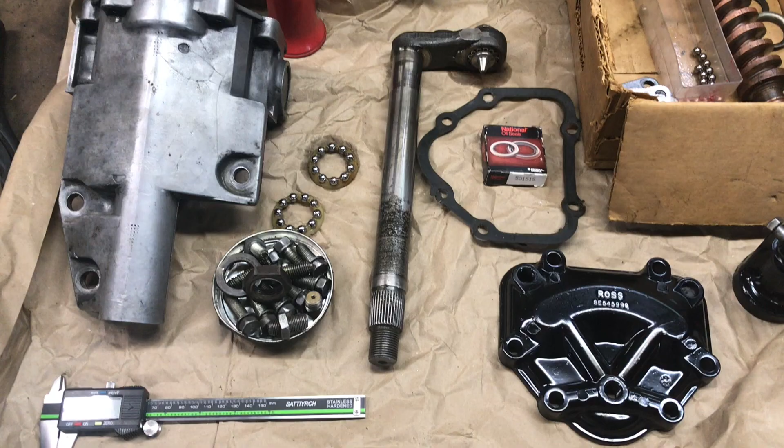Today I'm going to show you how to completely rebuild your steering box. This is the parts to my Ross steering box out of my 1965 Scout 800. I know Scout and International in general use different steering boxes, but Ross is the most common, and it's one of the more difficult ones to rebuild. So hence the rebuild video, and I'm going to show you how to do that in pretty good detail.

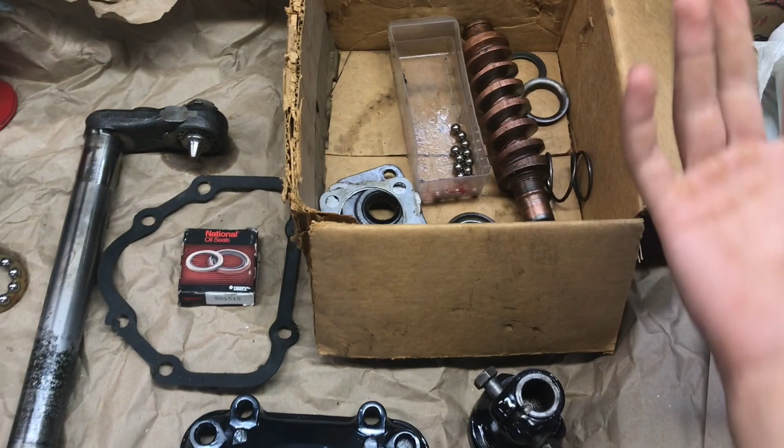I'm going to use the term rebuild pretty loosely here because some of these parts you can't get, like the sector shaft here, or the Pitman shaft and the sector shaft. You see mine is kind of worn there, and you can feel a little bit of pitting, because that's where the bushing rides, and this has a groove here and there occasionally, and a little bit of a chisel to it, but I was able to work that out, and I'll tell you how.

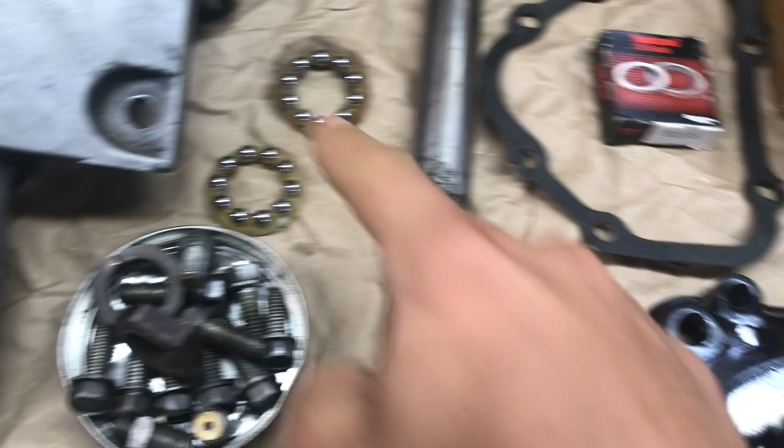And I don't have bearing races, I don't have new ones of these for the ends, but I do have a brand new seal for the bottom of this, and I have new ball bearings for that, and I have new bushings for the inside of the steering box for the Pitman shaft.

So I'm going to show you in detail what to buy and how to install the new pieces, because I had to get help with these bushings since you needed a press and everything, and I couldn't film it.

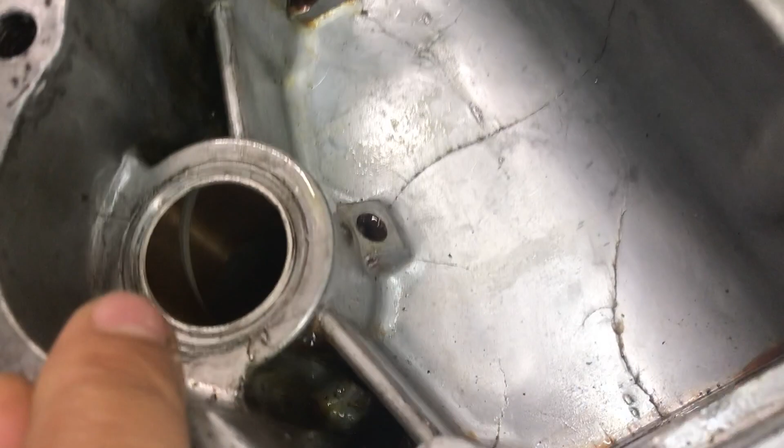Okay, so the first big thing is the bushings. These are brand new bushings, as you can see there. There's one at the top and one on the bottom. I was able to get these bushings from Straight Line Steering, a company out in California. I told them I have a Ross steering box, and I gave them that number.

So what you're looking for when you want to replace these is, there's all my old ones. Take it and measure it with the digital caliper, and the closest thing this matches up to, decimal wise, is 5/16 of an inch. So if you go to the hardware store, find yourself 20 or so 5/16 ball bearings and give it a measurement. Let's see if I can show you guys.

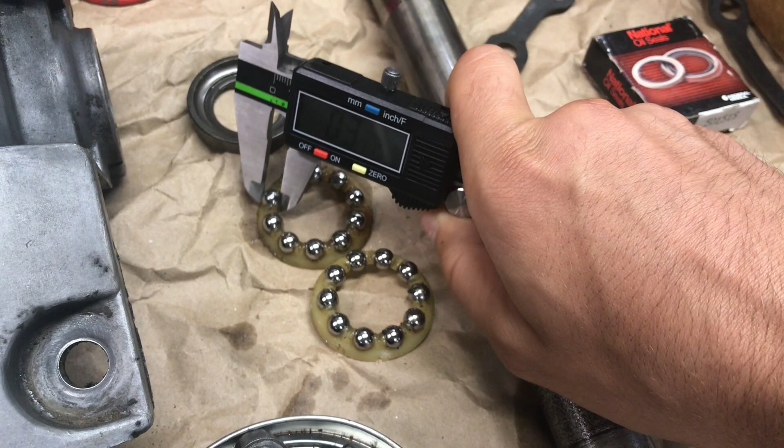Alright, so there's 0.3120. Those are the new ones.

And my old ones here. Stop rolling away.

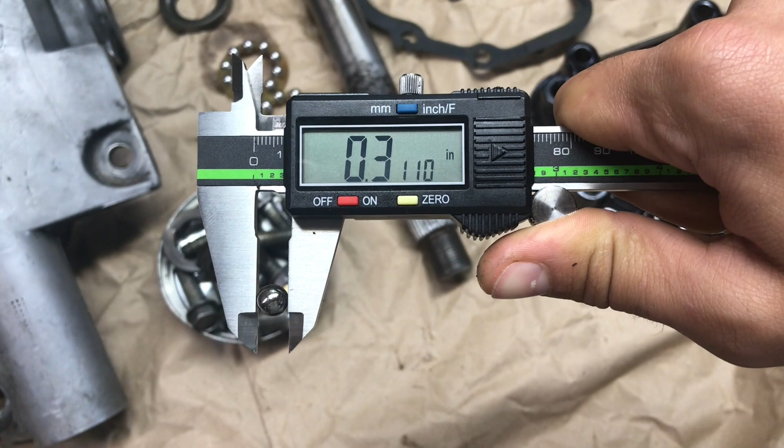0.3110. So these are a little bit smaller, and they're a bit worn out. Some of them have pitting, some of them have scoring. So it's best just to go spend like $5 to find some new ones.

And then you have this here - this is your Pitman shaft sort of thing that rides inside the groove here. This is what gets changed, spring loading wise, as far as how it sits inside here, and that messes with the mesh of the gears and how tight it is. It's just a little adjustment piece, and I'll show you how to adjust that once it's in the vehicle, and you can kind of feel around for it.

And so there's that, and then you have shims here. These shims are still good. I'll wipe them down a little bit, but otherwise they're fine. That's just to give the sector shaft a little bit of bushing so it could spin freely.

And then here's the end cap for the sector shaft, and it has this little seal in it. I don't have a new one of these - you can't get these anymore. I actually didn't ask Straight Line Steering, but they might have them, so there you go if you're looking for those. But mine is still pretty good, and it's still pretty pliable.

So I'll just pack it with grease and call it good. It's not like it goes under so much load - it just sits on this polished piece of brass. So how good does it have to be?

You tell me. Okay, so we talked about bushings, bearings, that seal. Now this seal - this is the one that kind of trips people up the most, and it's the one that always fails, because it's the most exposed to the elements, like when you're driving, heat and snow and whatnot. Depends how much you drive your Scout, but because mine was a plow vehicle, the bushings were worn slap out, and this seal was garbage.

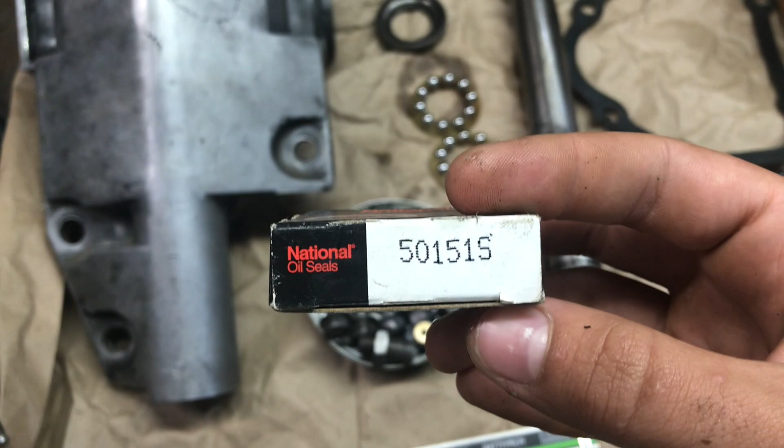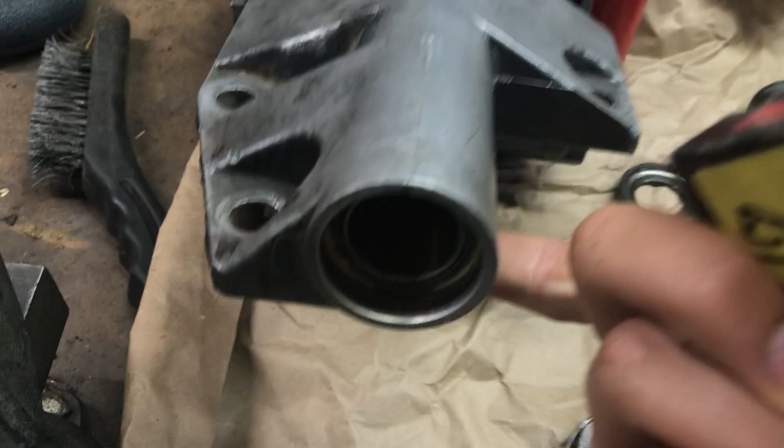So this is National Oil Seals Federal Mogul, part number 50151S. I got this from Advance Auto Parts. I think it was like $10, and it fits perfectly in the bottom here on that ledge there, and it will stop your steering box from leaking.

So if you just want to do this, it's easy enough - you could probably do it while it's in the vehicle. If you pop your cover off and pop your Pitman arm off, if you have the little puller for it - mine was really easy to pull off, but I didn't have the tool, so I took it to a buddy's shop and he did it for me.

But it's easy enough to kind of pull this out, so you get this out of the way, and then I think I pulled mine out with a screwdriver, and I'm just gonna install it with a socket with a little bit of blue Loctite. So nothing fancy to do that.

And then I was able to save my original gasket, but I'll put a little bit of RTV on there just to be safe, just kind of skin it, so it's got something to stick to in some areas.

But unfortunately, you can't get this and you can't get that, and I'm sure you could get this spring, but it's still pretty good. You could even stretch it out a little bit if you need to. And then you just have these shims that don't really wear out, so it's a pretty non-wear-outable, if that's a word, kind of unit.

So basically, mine is somewhat of an extreme case, but yours, if it was just used for normal driving throughout its life, isn't going to see this much wear, you know.

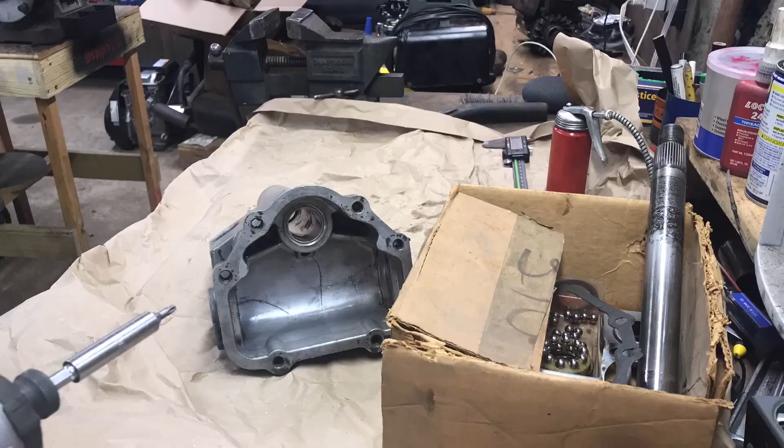Alright, so you saw me there put together and clean up the steering box a little bit. There's just a little bit of paint and grease and whatnot. So now I'm going to show you how to put your stuff back together as far as your sector shaft goes. The best thing to do before putting these parts back in is just wipe them down, nothing special.

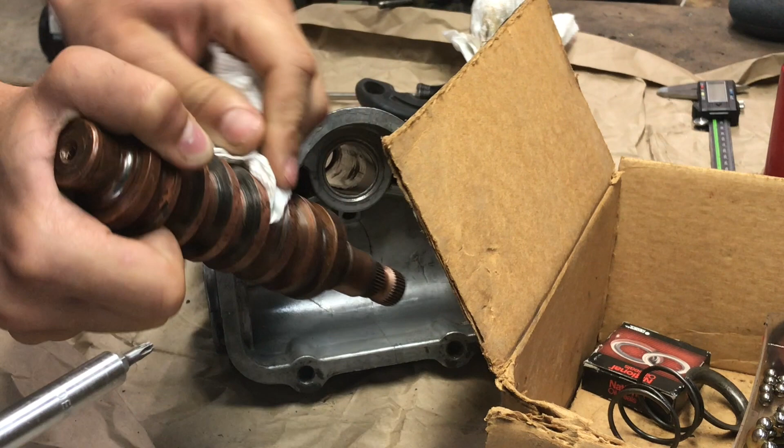Here you go, just like that, to pull any dirt out of it. Maybe from sitting, or maybe you just didn't clean it yet, but I've hosed this stuff down and brake cleaned many times, so it's as good as it's gonna get.

One thing to mention too, you want to make sure this surface is clean, because that's where your seal rides. You want to make sure this is clean too, because on your steering column, this little doohickey slides on the splines and engages with the rest of the steering box and turns this.

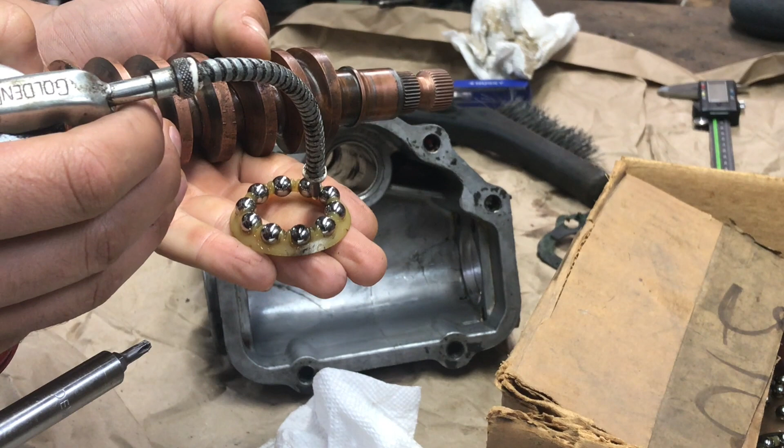So next thing you want to do is take your bearings here and give them a quick spray with some grease, because grease is a little thicker. You could also use assembly lube, but that's a little too thick in this case. So just kind of coat that around.

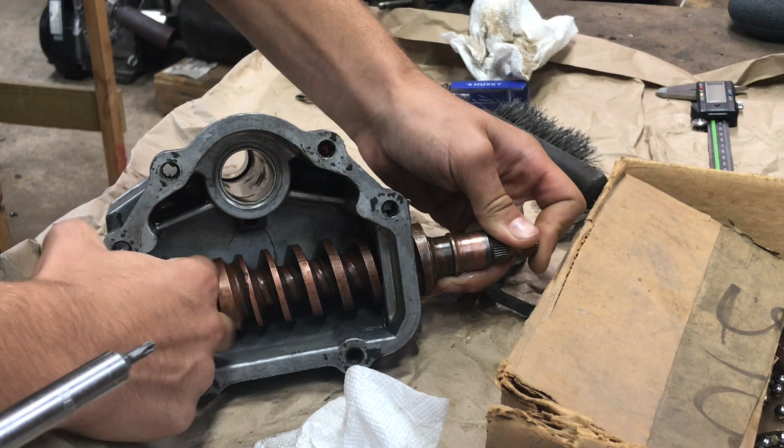And then on the inside here, we have our bearing race. So just gonna plop those in there, hold them in, and feed it through here. Just be careful not to nick the things too much on the edges, but it's aluminum, so you're not gonna hurt it too much. So that slips over that, and there you go, it's in there, right there, and then do the other one.

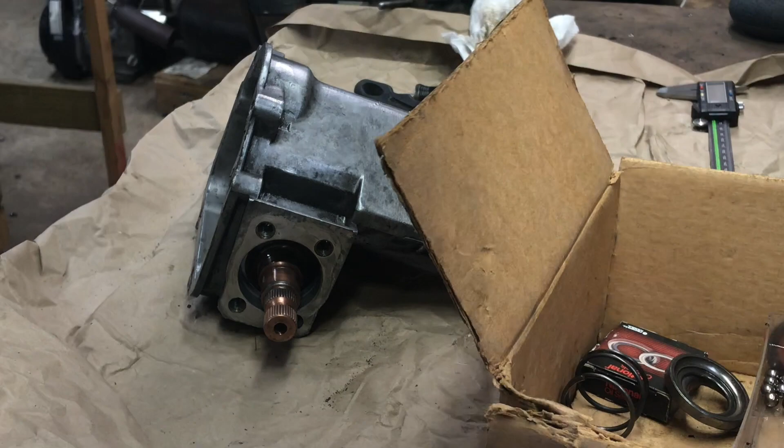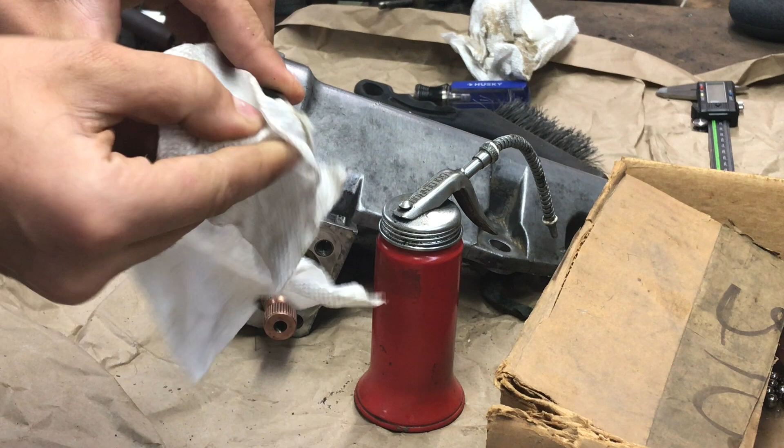So there's that. Just gonna wipe these down. Looking pretty good. So same thing as before, got our race here, put in our oil there, lift that back up there, and then clean your race. Just make sure there's no crap in where the bearings ride, because it'll just get ground right into those bearings, and you know, God knows.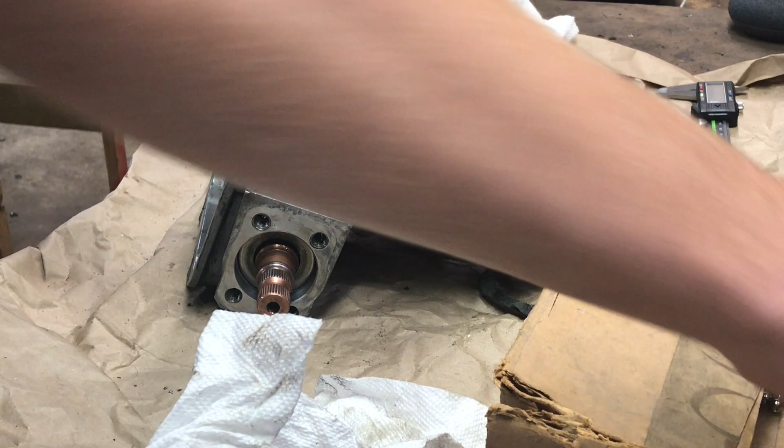So a little bit of oil on that too. And there you go, there's that. So then we have our cap here, which is all cleaned up already. And then that's got kind of an insert that sits inside of here.

And then we have our shims, which I think are a tad rusty, so I think I'm just gonna throw some WD-40 at them and wipe them down. Just a word of advice: here's the thin shim, and here's two thicker shims. You're gonna want to sandwich the thinner shim on the inside of the stack, just so the thinner shim gets compressed by all the other ones, versus making too much of a clearance or too little of a clearance when you torque down these bolts. So I'm gonna clean these up a little bit more, then I'll put them in.

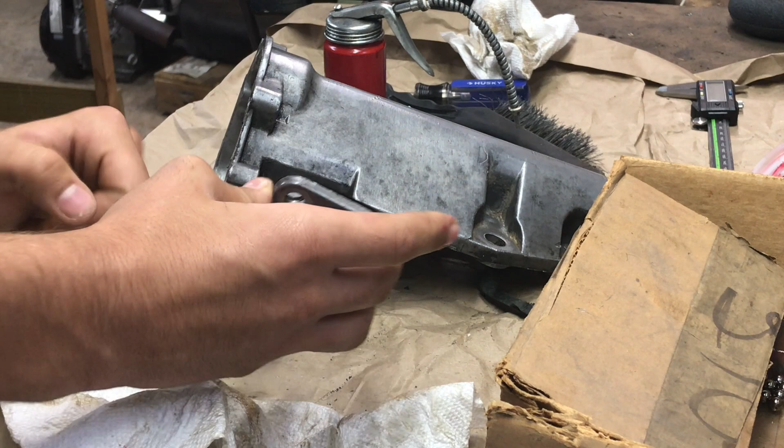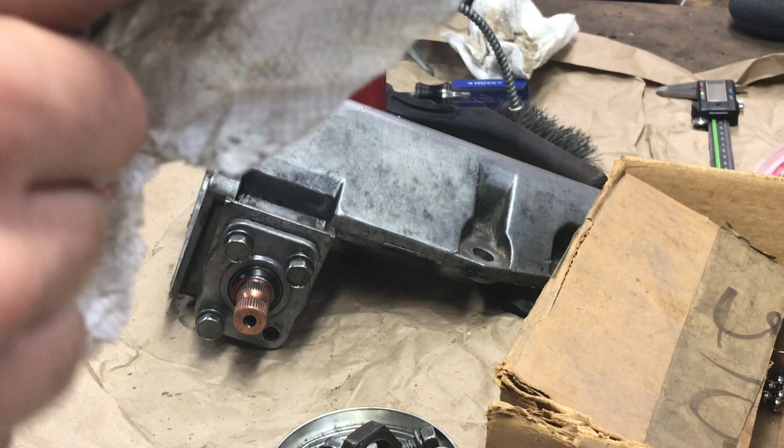Okay, so I went ahead and put my shims on after I got them cleaned up for the most part. And then I'm gonna take a little bit of grease here, not a whole lot, and just sort of fill it in and scrape it on the inside of the box here, or the seal, and that packs it in good. And then put that on, make sure my sealing surface here is clean, and just slide the whole thing on.

There we go, okay, now there's that, and then I have my hardware here, and it's these shorter bolts that just thread in right into the case. So throw those in.

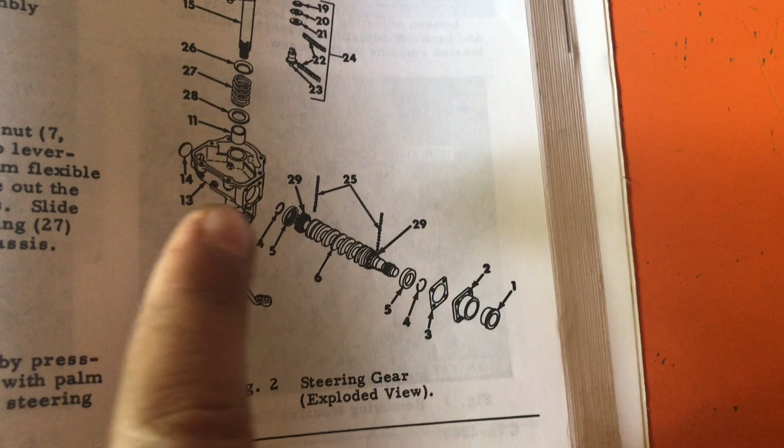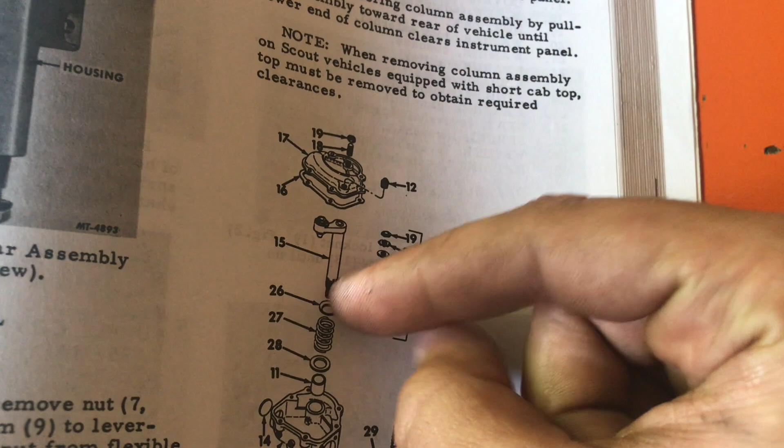And I did clean these up ahead of time. That was part of the lost footage there during - I don't know what happened, but whatever. So this one had a little bit of crap in the threads, but not gonna worry about it.

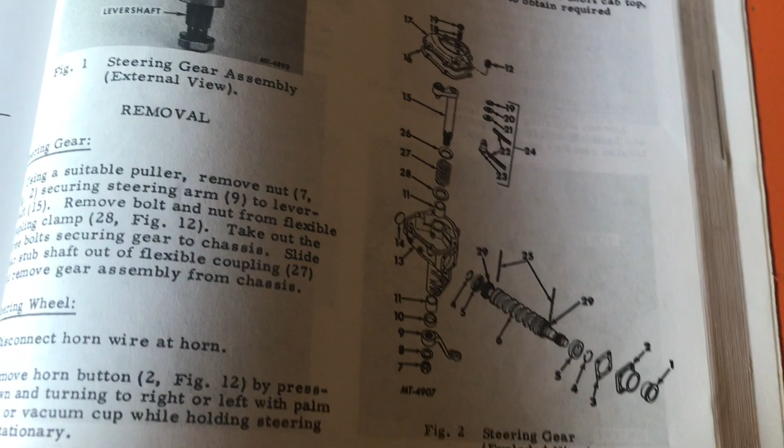Okay, so I'm gonna thread these in the rest of the way, and you're just gonna want to snug them down. Maybe use an impact to give them one or two sort of clicks. I don't know any torque values for these though. It's a bolt going into an aluminum case, so you can't over tighten it - you'll strip the threads right out of the box. So then what are you gonna do? Use your best judgment when it comes to that, and then I'll show you how to put in the Pitman Shaft.

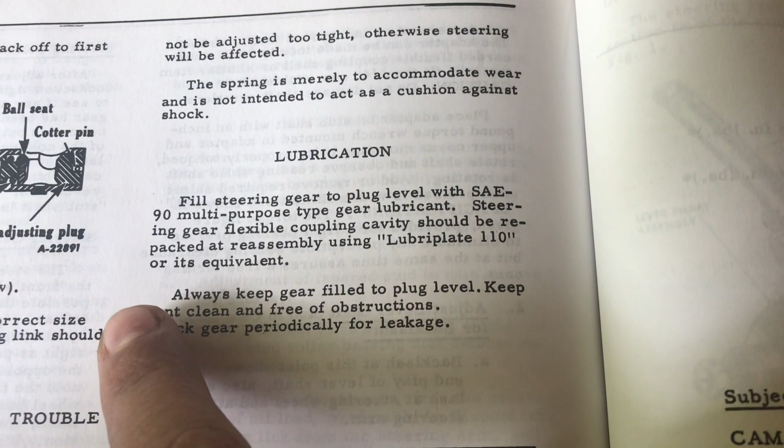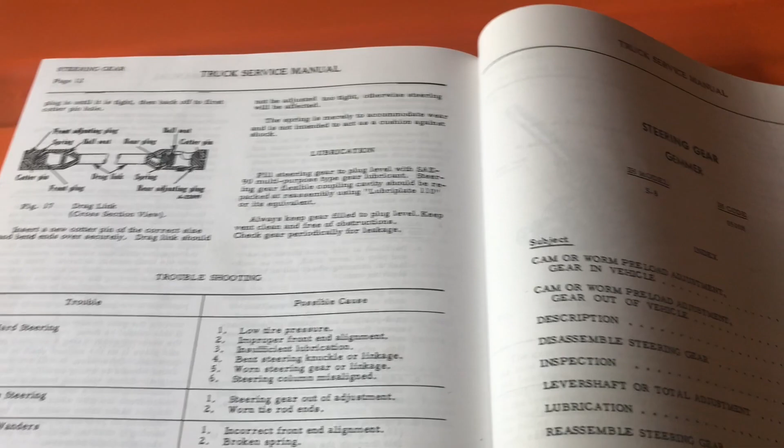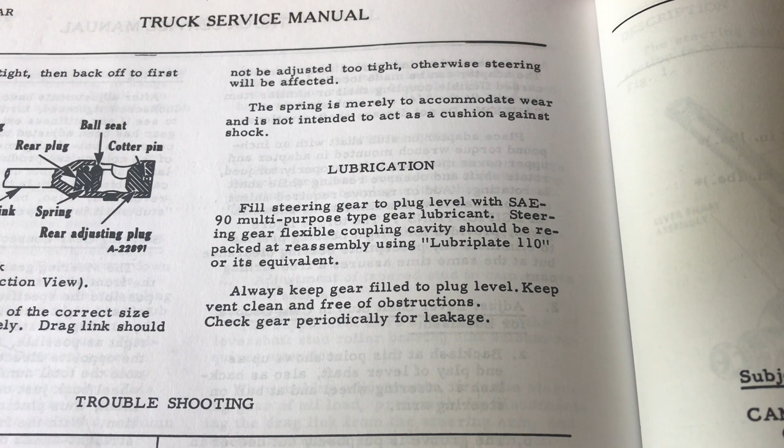I can't find it. Hold on. Stand by. Nope, too far.

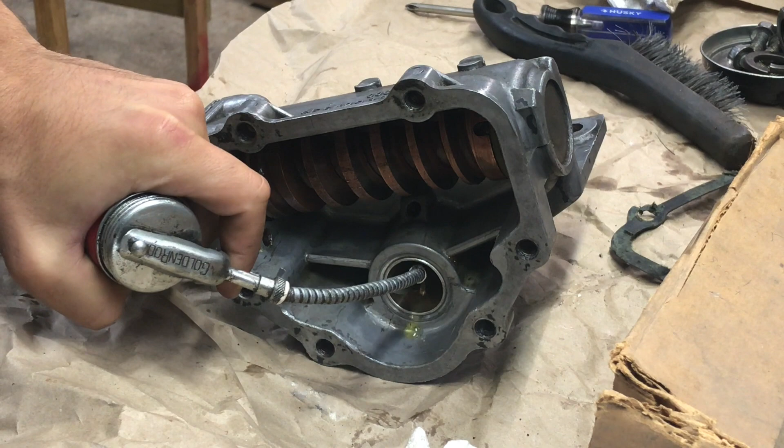Anyway, whilst I find it here, I hope you guys are having a good week. It's been a little hectic over here, but I'm not complaining. Anyway,

Fill steering gear plug, SAE 90 multi-purpose type gear lubricant. So I have a good plethora of 80W90, so that'll work just fine. Just gonna fill that right up. Easy enough. Always keep gear filled to plug level, keep vent clean and free. Should check gear periodically for leakage. Easy enough, guys, that's what we're due.

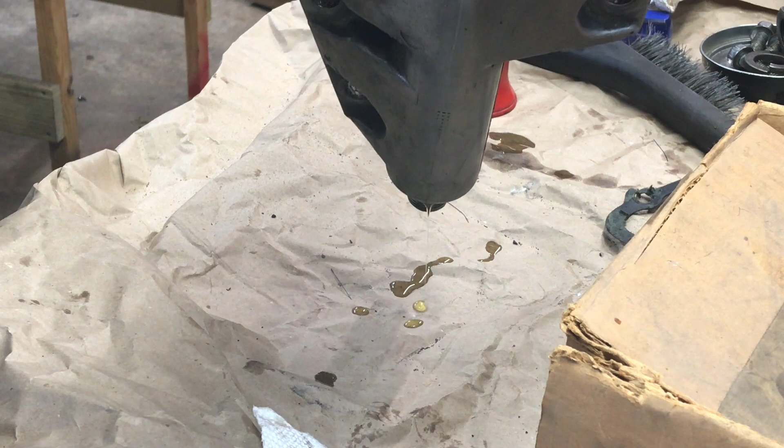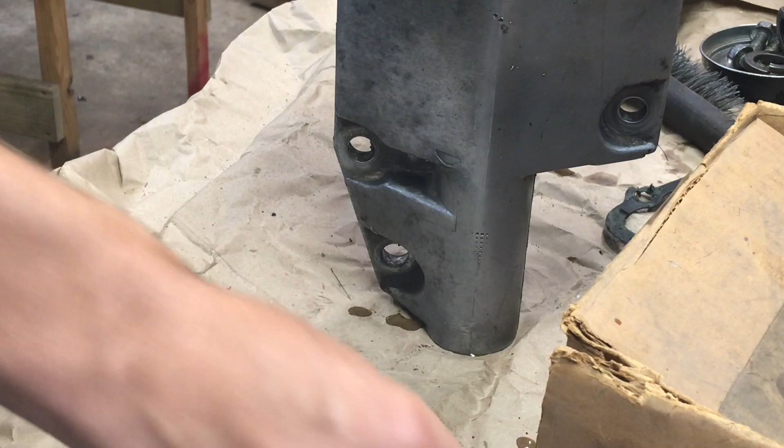So let's get back to it. Okay, so first things first, I got gear oil in here - that's what I've been using the whole time. So just gonna trickle that in there, and then all along inside those grooves, and then in the back. Okay, and then I already have the shaft rubbed down with oil, but I'll clean it and put better oil in it.

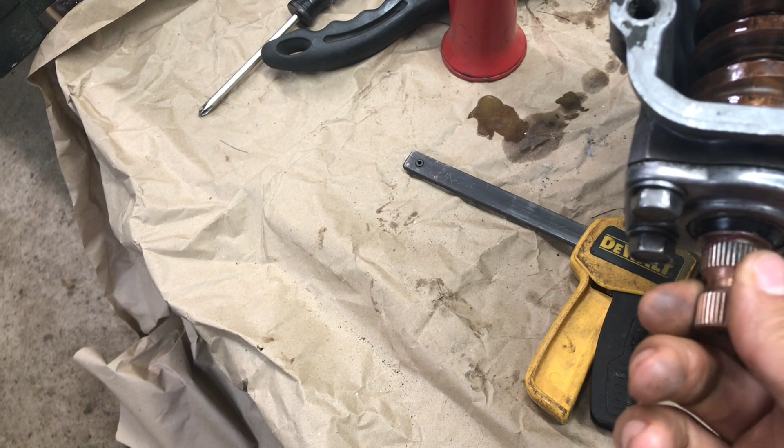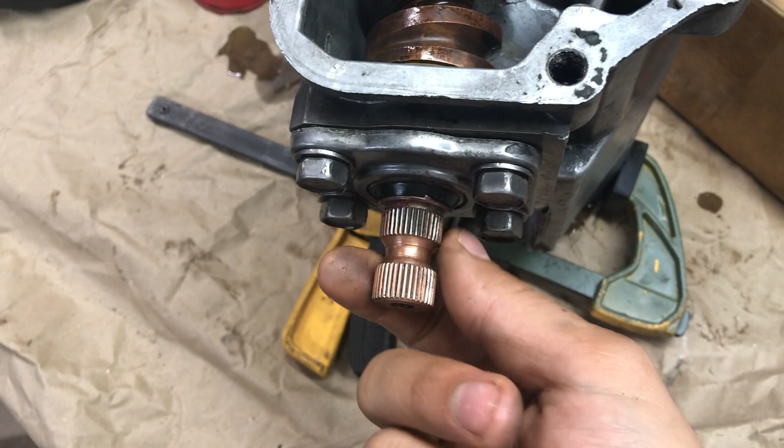Okay, so there's that. And then I have my bearing cup, or not bearing cup, but like a bushing cup thingy, and then my spring, and then my washer thing. There you go.

Okay, so as you kind of maybe sort of saw there, I installed this. Just be careful not to nick your bushings too much when you're sliding this in, but I think I did fine - you're not going to hurt it really. And so this is spring loaded, so I have a clamp holding it up just like that.

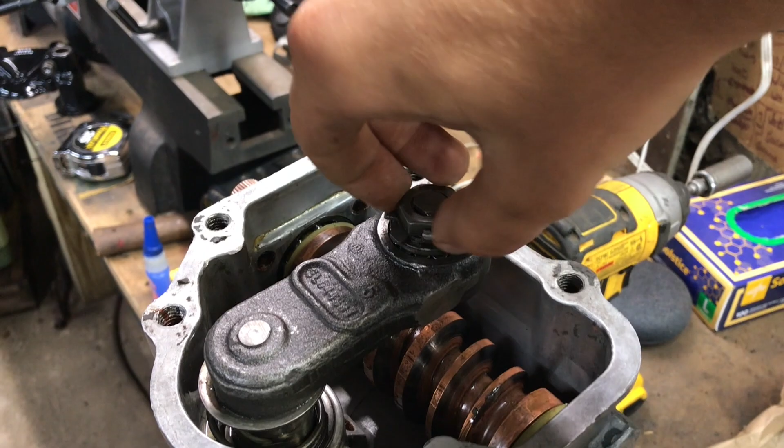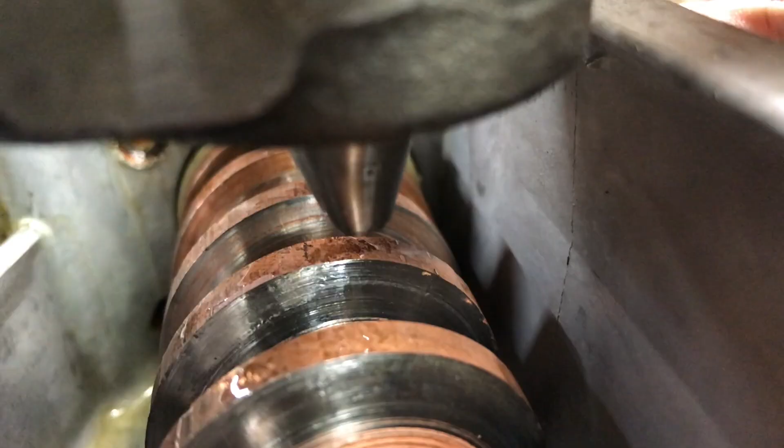And so I'm actually going to set it up in the bench vise there and fully lock it down, and then my plan is to mark where this sits directly halfway like this, and mark it on the outside of the case so I can line up my Pitman arm again, and align my steering wheel with a little coupling piece that goes here. I'm not too sure how I'll accomplish this - maybe if I put it in the vise and press down on it, I mark the shaft that way. We'll give it a shot.

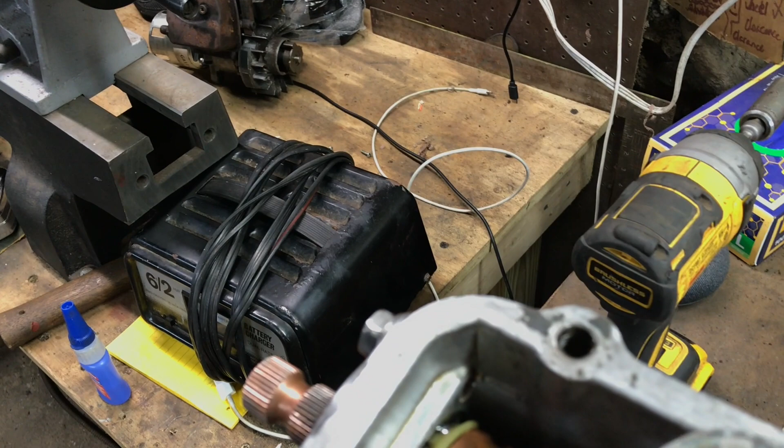But I'll probably just put a white mark on there for now, and then score it with something so when I paint over it my marks don't disappear. So I'm going to set that up and mark it real quick off camera, and then I'll show you how to throw the cover on, tape up the pieces we don't want painted, clean up the rest wiping it down with mineral spirits to remove the grease and oil, and then go outside and give it a coat of paint. So yeah.

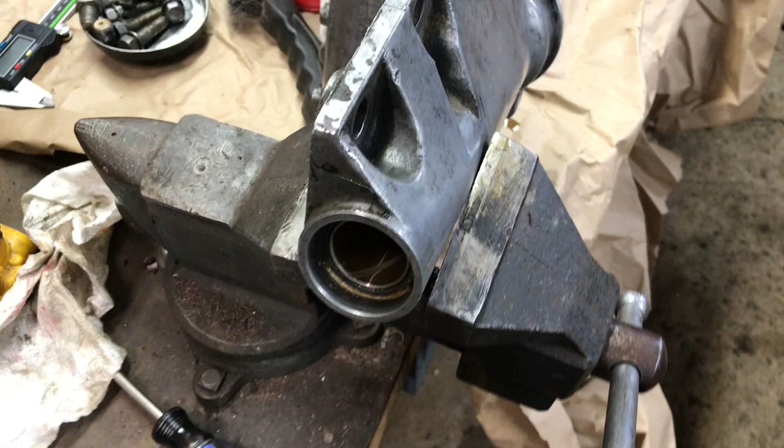That's where it was kind of worn in, and all I did was take it and put it on my wood lathe. I put it right in the chuck, and I just turned it, took a fine file and some sandpaper, and worked out that edge. I reduced the diameter by a little bit, but I was able to clean it up really nice, and it seems to engage really nice. It feels really good, so I'm excited about that.

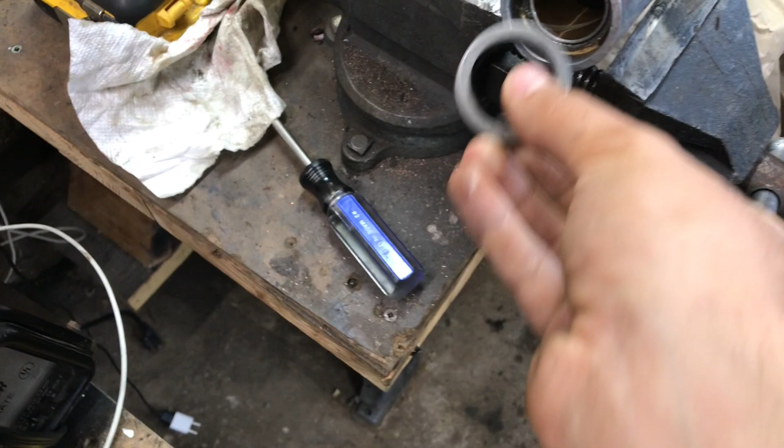Unless yours is kind of badly worn in like mine was, never take this apart, because it's impossible to get it back together. It took me a couple hours just to get all the little tapered bearings in there, and the trick was to hold this in the middle while you place in all of them. I don't even think the things are equal — like this side takes 13, that side takes 11 or something. Maybe they're equal, I can't remember, this was a little while ago. But it was terrible, so word to the wise, you never know.

So there's that, and now I'm gonna slap on the cover and get this adjusted. I'll show you how to feel for that and how to do that. So here we go — all right, I actually got ahead of myself there.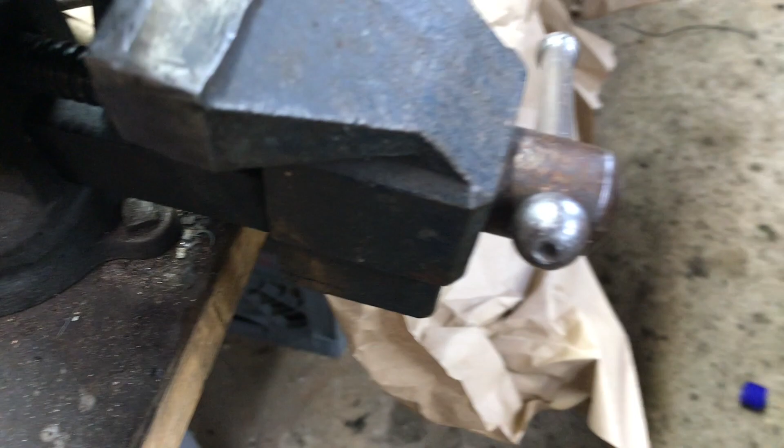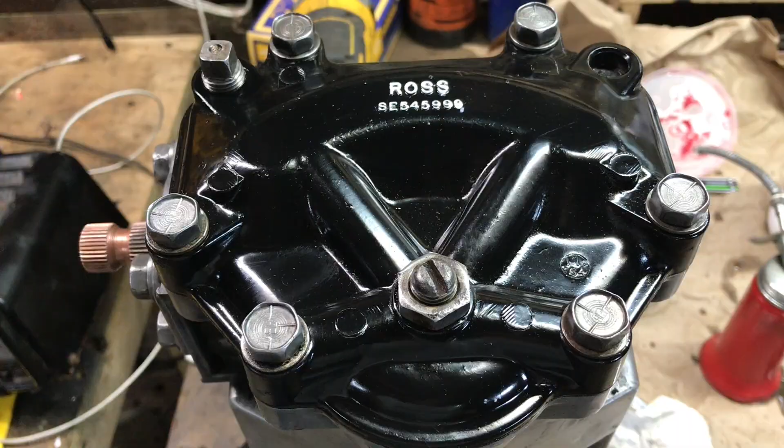Need to put in your little seal here, and the text on the outside of the seal is what's going to face out, and the sharp edge is going to face in to keep the stuff inside. So all I'm going to do is grab a hammer, slightly tap it in here, and then I'll use a socket to get it the rest of the way in, just looking to get it started.

I'm gonna grab a socket and seat it the rest of the way. It looks like maybe an inch, 15/16 — we'll see, I'll show you what I grabbed. I ended up grabbing a 1 1/8, and it fit nice over, so I just booped, put it in.

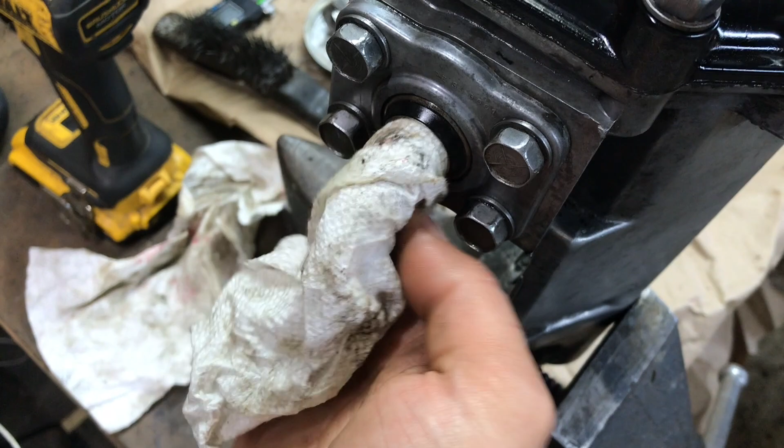With that installed, now we can throw a little bit of gear oil in there. I might as well throw some grease in there too. Slide the shaft back in, and then throw the cover on for the last time, hopefully.

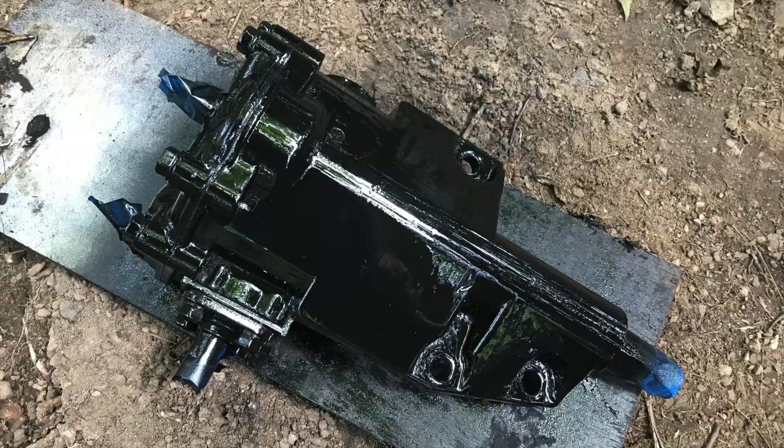Okay, so I topped it off with gear oil up to the fill plug like the service manual said. The trick is that you want to back off the nut far enough to thread in your adjuster until it gets tight against it, like that, and then you want to just back it off a touch and then tighten down the nut and check that you don't have a lot of play. But right there, you can move it like that.

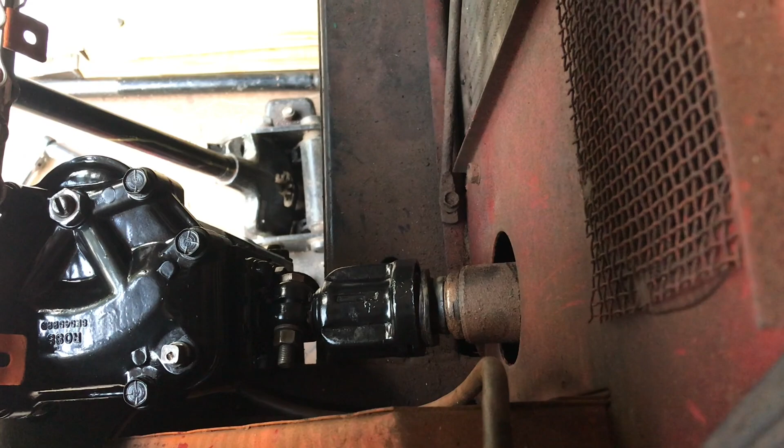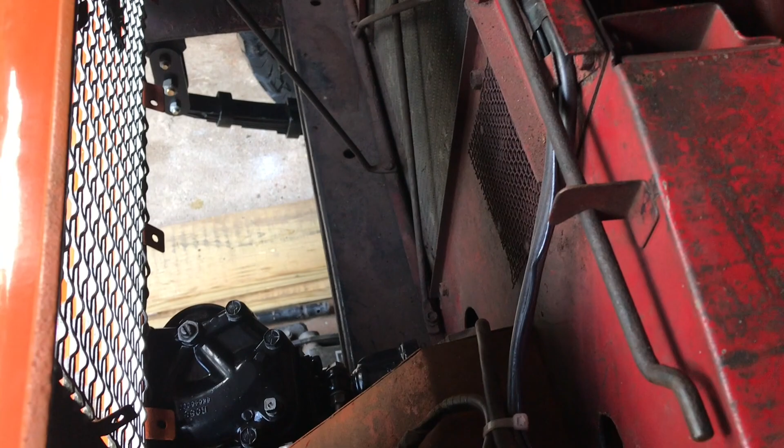And I'm getting direct movement with no loss, no slop or anything, and my end play is perfectly within spec. It turns beautiful, everything like that, so it should be all set.

So now I'm going to go ahead and tape off some of these parts and paint them, and then I'll meet you back when I'm finally ready to install it back in the Scout. So stay tuned.

Alright guys, so I got the steering box all installed. The way you do it is you point your steering wheel straight, figure out where your little coupler piece lies, and then set your steering box directly at half, hence that mark I made there. Once it's at half, you slide everything together, make sure everything is seated fully, tighten down the mounts for the steering box, tighten down your coupler shaft, and then slide on your boot to keep any dust out.

So that's all, hope you guys enjoyed the video. Hope you found it helpful, and tighten up that loose steering of yours if you have it. If not, it's an easy rebuild to do in an afternoon if you've collected all the parts together. So hope you enjoyed, take care, stay safe everyone. Thank you.